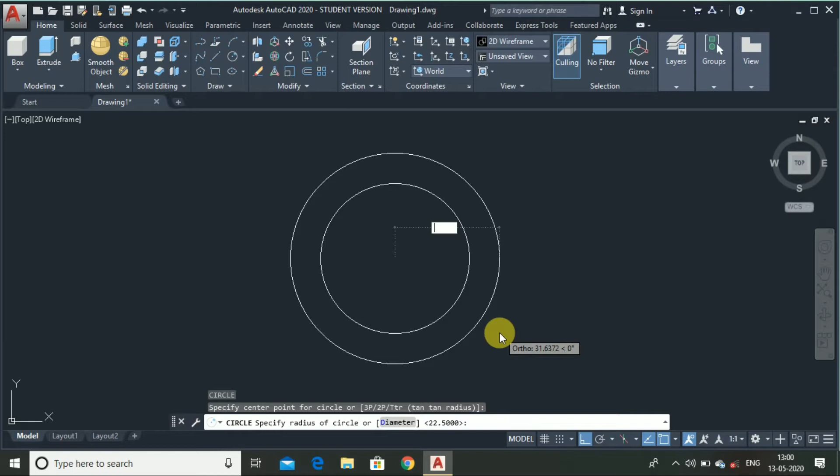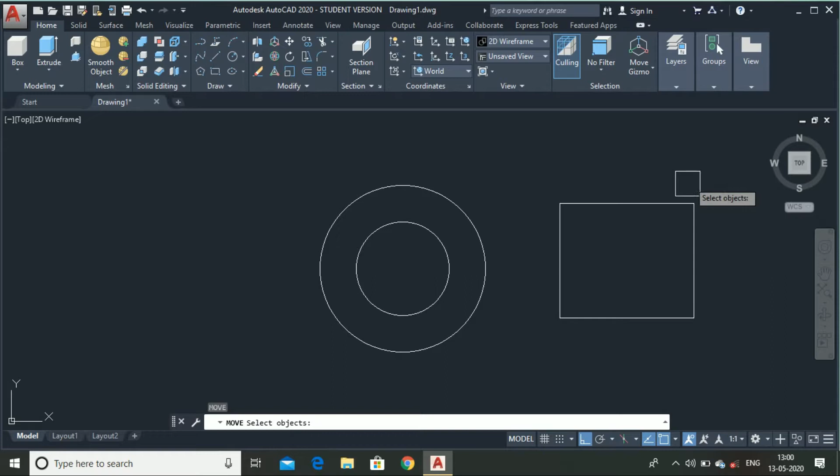Then make a rectangle, select the first point and type 65,55. Now select the move command, select the rectangle, select the midpoint, move it to the center point. Choose the isometric view.

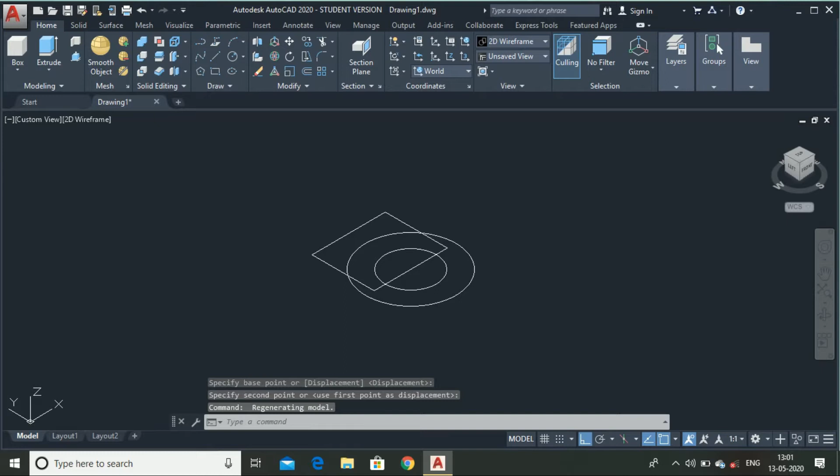Now type extrude. Select both the circles first, then move it to the upward direction and type 75 units.

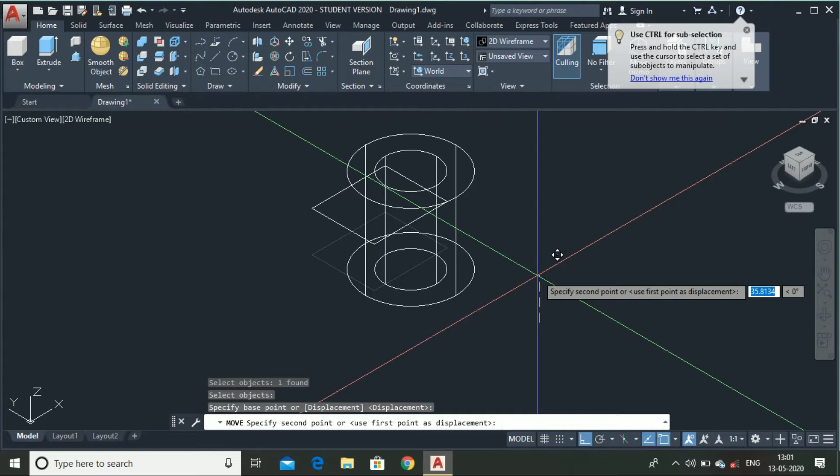Now again type the move command, select this rectangle, select any point, then type 7.5 units. Now again use the extrude command.

Extrude this rectangle to a height of 25 units.

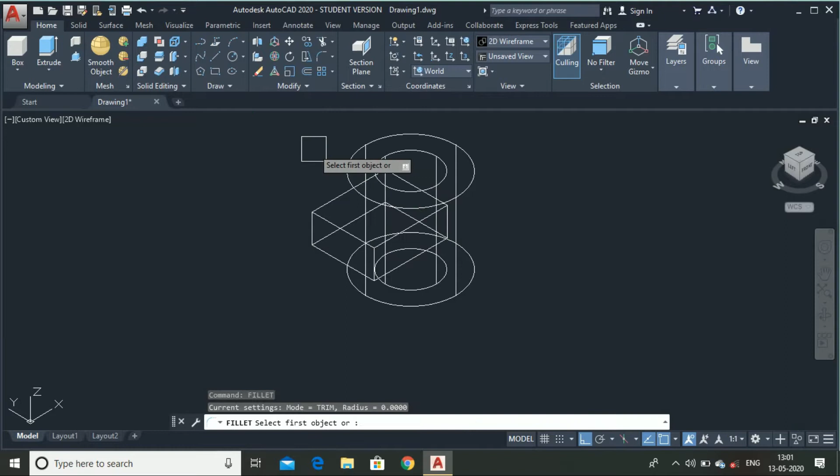Now use the fillet command, fillet this edge with a radius of 12.5. Again use the fillet command, select this edge, double enter.

Now choose the left view, type UCS V, enter. Now change UCS to this viewpoint.

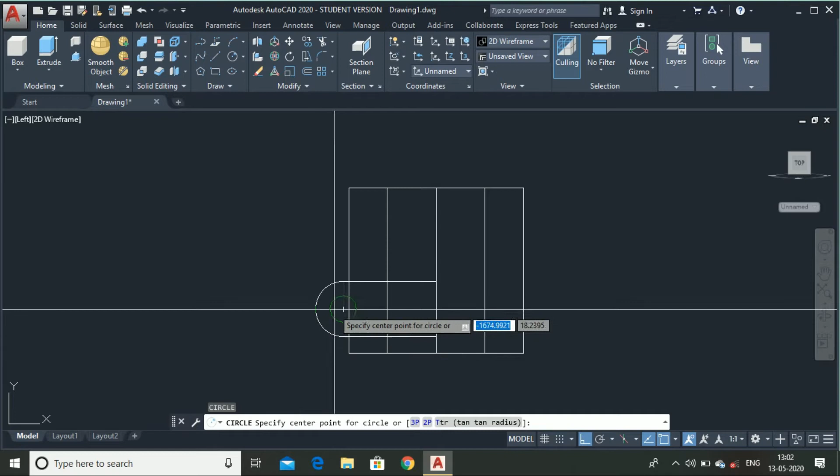Now make a circle from this center point of diameter 9 units.

Again make a circle of diameter 15 units.

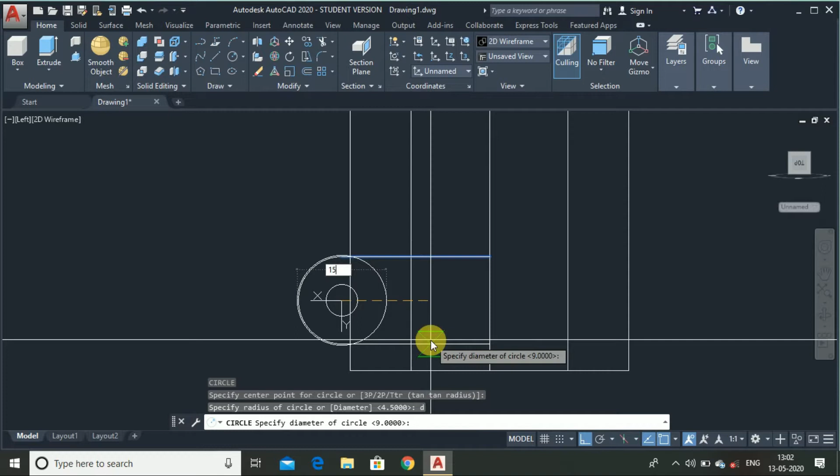Now make a line from the center point to an angle of 225 degrees. Select just outward of this line, that's enough.

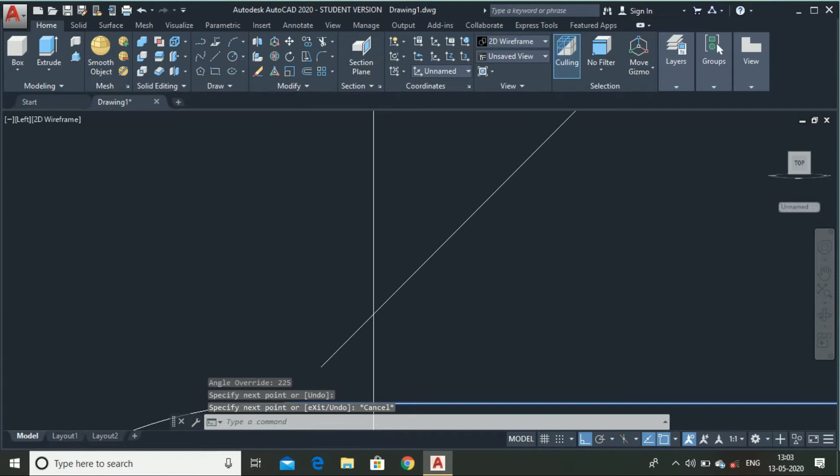Now type UCS to world, choose the isometric view.

Now type move command, select this line. Now move it to the center point. We will use this line later.

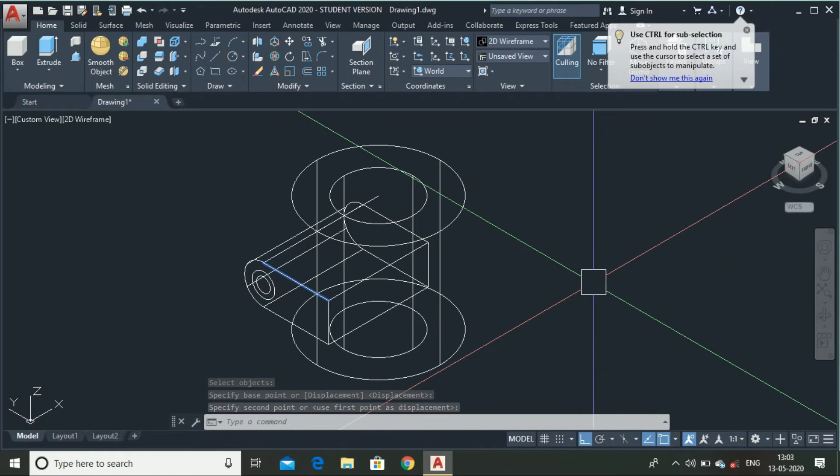First, now select the top view again. Now make a rectangle, select any point, type 3,100.

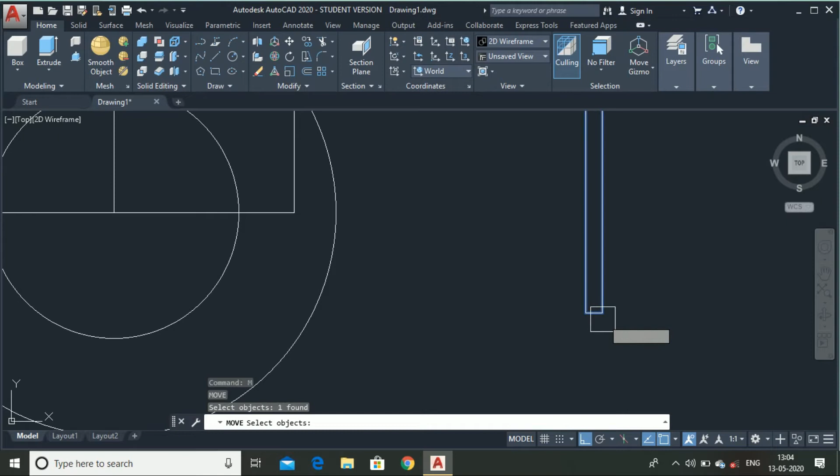Now use the move command, select this rectangle, select at this point, choose the isometric view, move it to the center point.

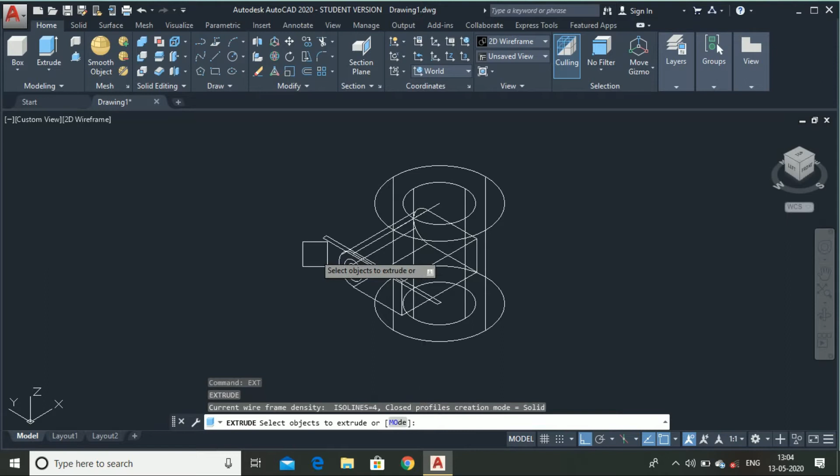Now use the extrude command, select this rectangle, extrude to this length. It just crosses the whole part so that we can subtract.

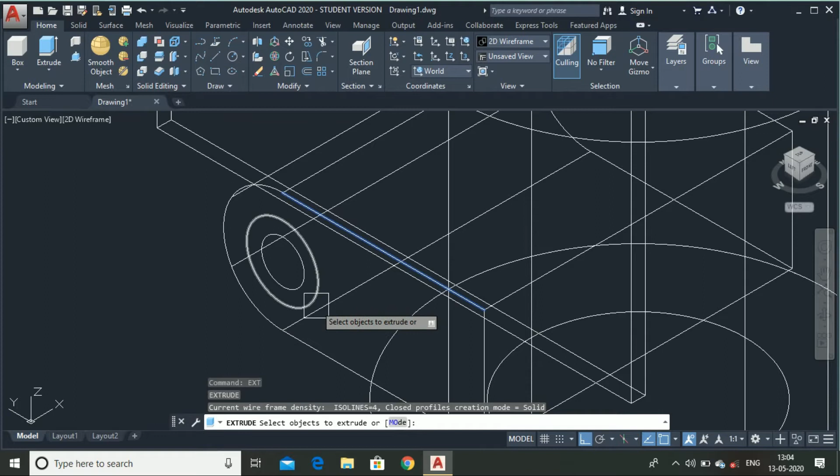Now again use the extrude command, extrude this circle first, to a length of 8 units. Then again extrude, select this smaller circle and extrude it to 65 units.

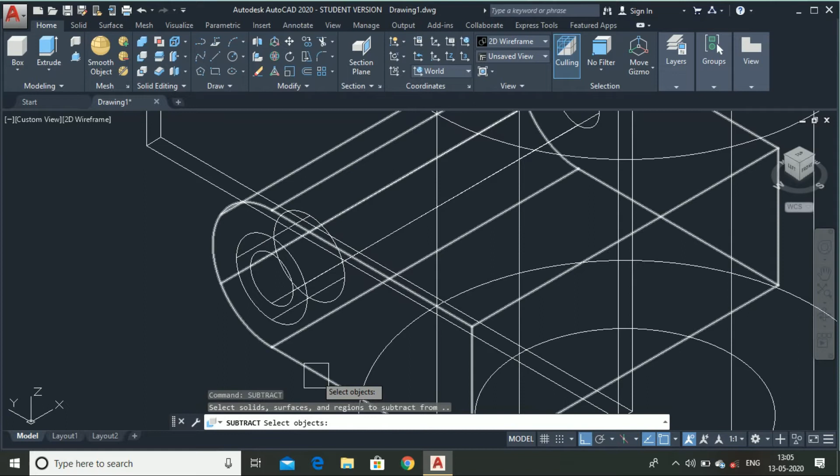Now again type subtract, select this object, press enter, then select these two objects. Again use the subtract command, select this and this.

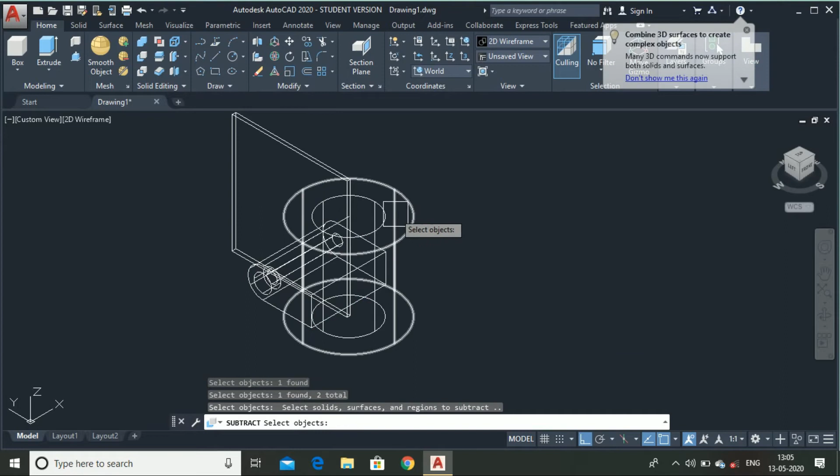Let me try again. Select the subtract command, select these two objects, then this inner circle.

Now again use the subtract command, select this object, then this object. Now change the viewpoint to this point.

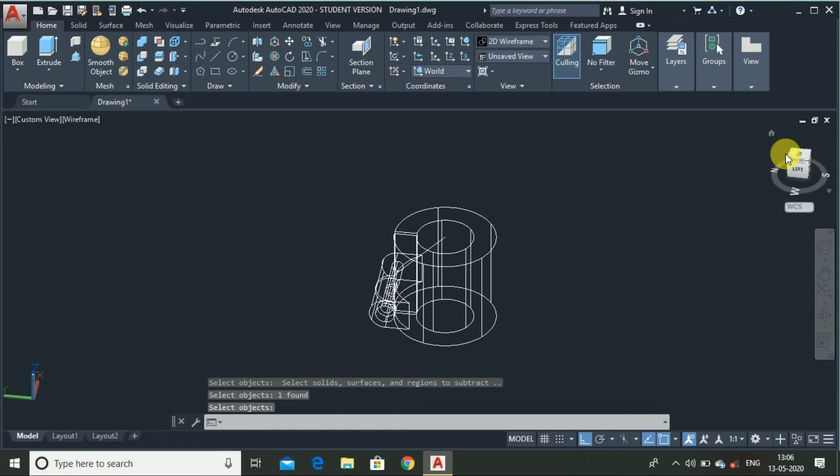Now we will extrude this line as a surface. Go to the surface tab, select the extrude panel. Now extrude this line to this length in this direction, and again extrude this, select this line and extrude to this direction.

Now use the slice command. First select this object, then select the surface, then select this, press enter.

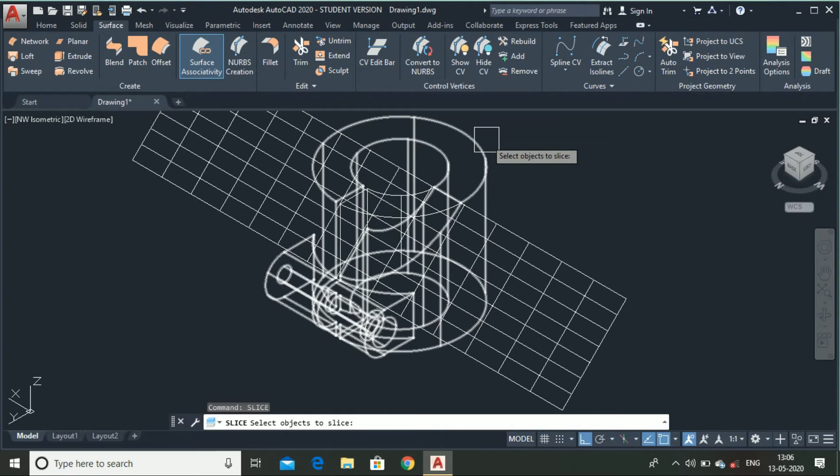Now again type slice, select this object, press enter, select the surface, select this surface. Now select both the surfaces, we don't need this.

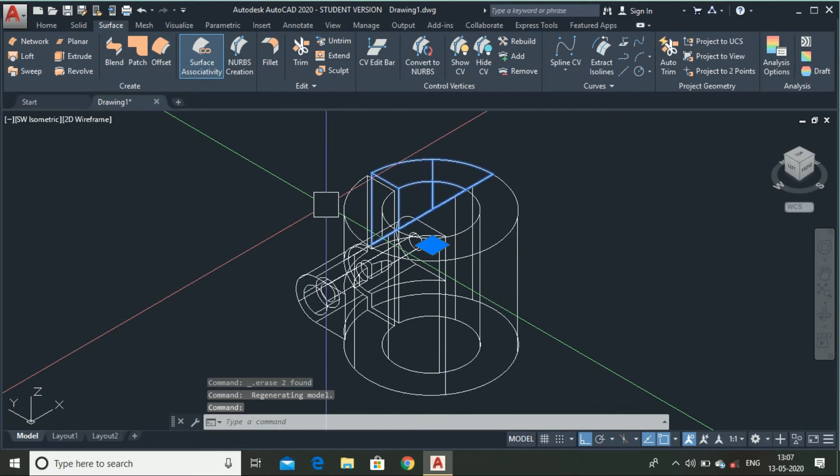Now change the viewpoint. Now it is sliced, this part, delete both the parts. Now we also don't need this line, delete this.

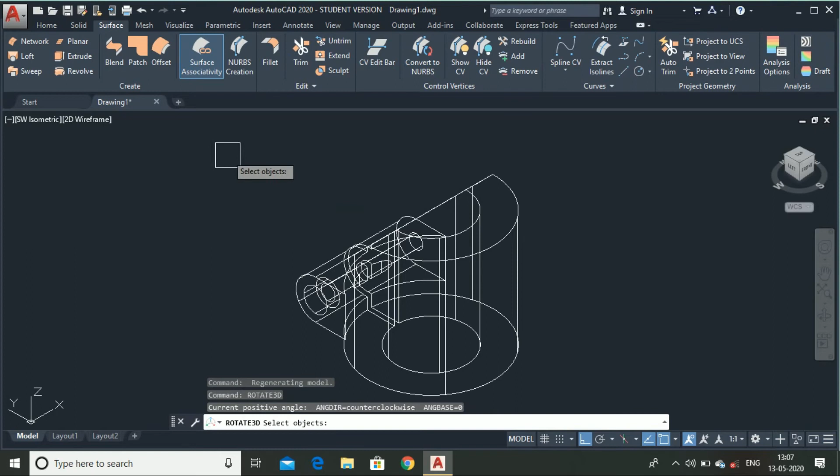Now let me show you by rotating this. Type rotate 3D, select both the objects, press enter, type the x-axis for the rotation, select any point. For the reference type 90 degrees.

So this is what I am trying to draw. This is a sleeve cap which is used to hold two shafts or two sleeves together.

Now let's fillet this. Type fillet. Fillet these two lines with a radius of 12 units.

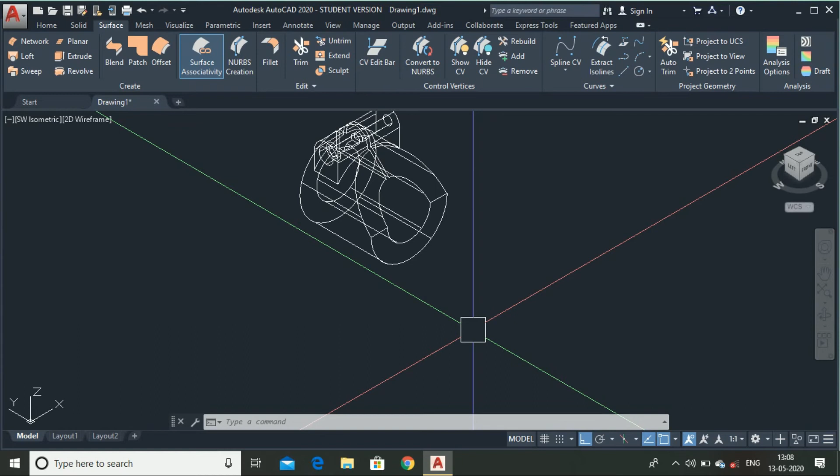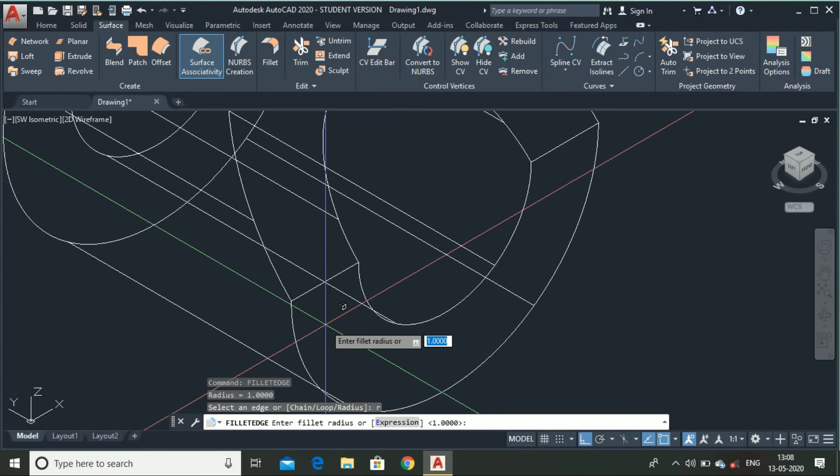Type fillet edge. Type fillet edge. Then type R, enter the value as 12, select this line, then this line, press enter and enter, and here it is.

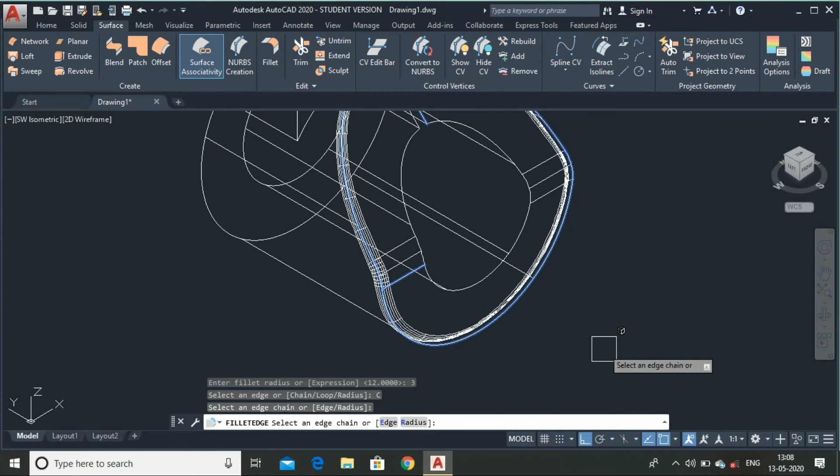Now again fillet edge, type R, enter the radius of 3, select this chain option, then select this line and this and press enter.

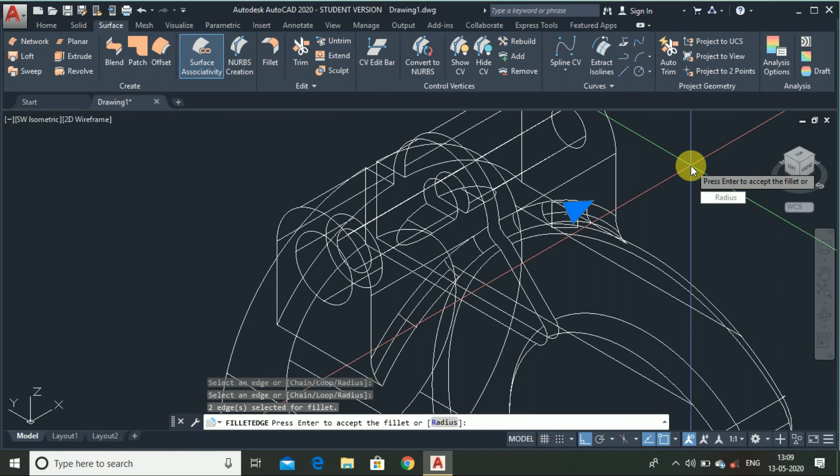Similarly you can fillet this edge also, fillet edge, select this and this, press enter. Now let's try, similarly you can fillet the remaining parts with a radius of 5.

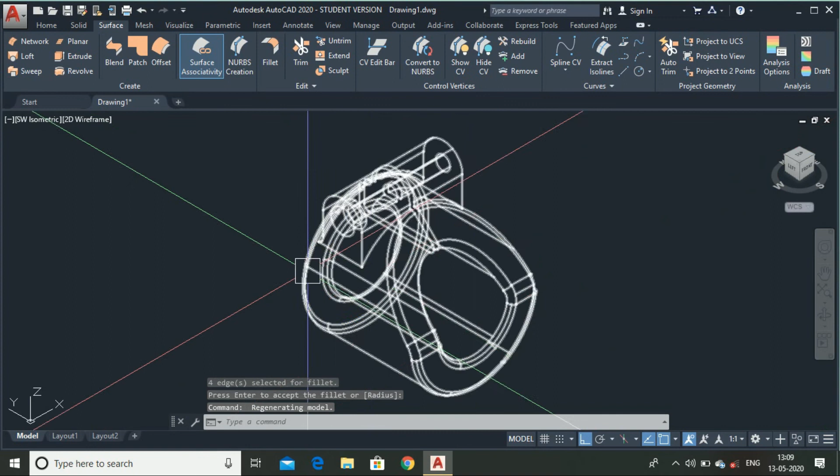Now here it is, we have completed this diagram.

Now color it, type color, choose any color that you want. I choose this sky blue color, click OK. Now draw a line.

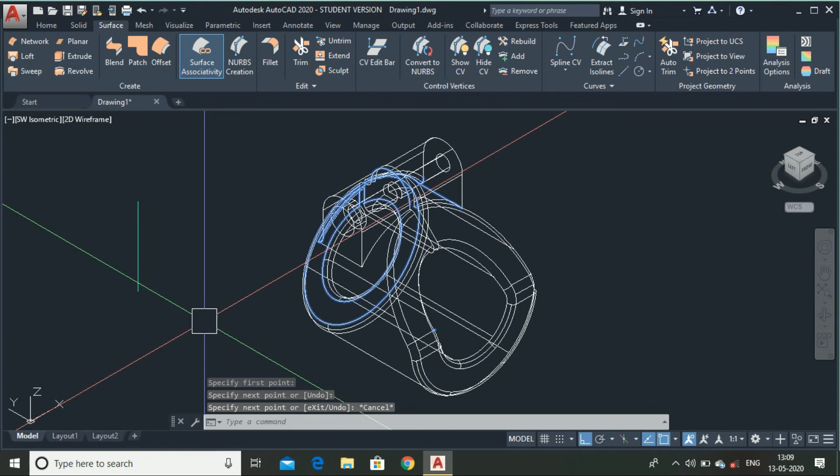Now you can see it is in the same color. Now type matchprop, this is used to change the property. Select the source and the destination.

Now let me show you in this shaded with edges view. And here it is, the diagram is completed.

I hope you like this video.